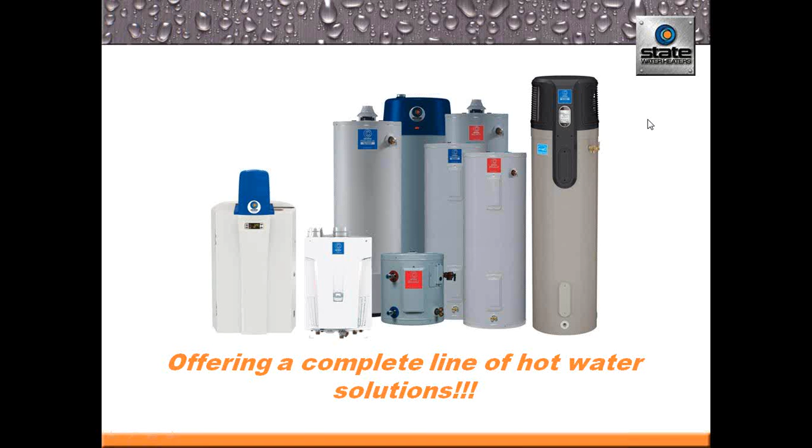I'll go over all the changes for 2014, and next I'm going to touch on the preparations taking place right now for 2015 with code compliance changes that are on their way.

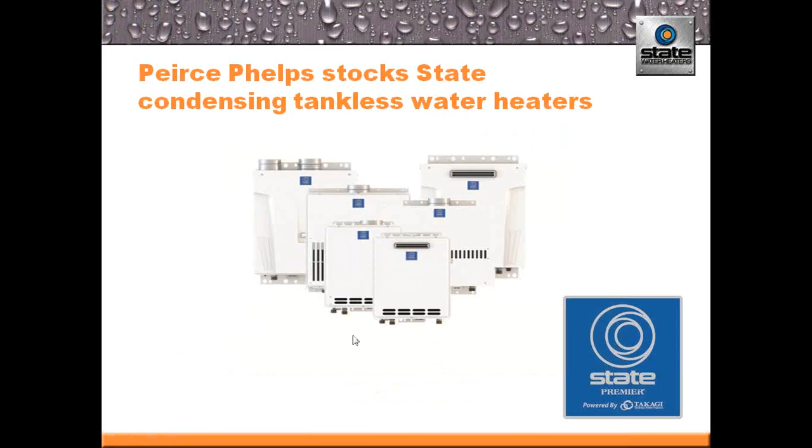As always, we have the fullest breadth of products in the market, and we continue to add to our product offering. As many of you are probably already aware, Peirce Phelps is now stocking State tankless water heaters, manufactured by Takagi. State owns Takagi North America, so we control that manufacturing.

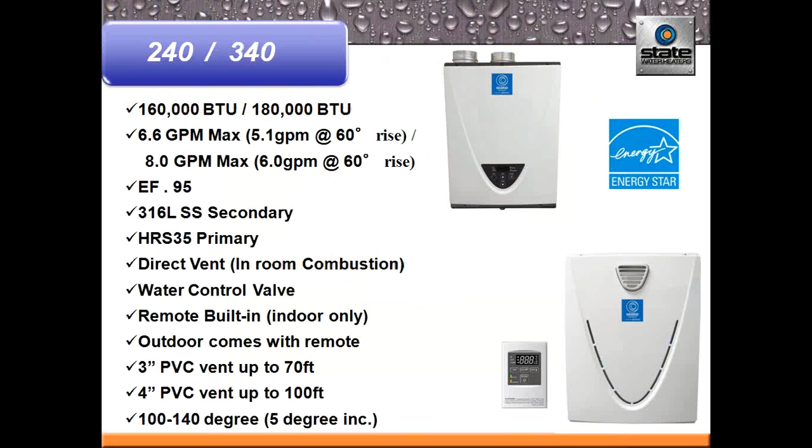Just a little side note for everybody, we are in the process of developing a manufacturing facility here in the U.S. that should be complete hopefully in another 2 to 3 years, where we will be manufacturing 100% American-made tankless water heaters. So we'll be the first manufacturer to have that, which will go a long way with our contractors and with the end users as well.

The models that are available, that Peirce Phelps is stocking, are all of our condensing models, which is 3 models, a 240, a 340, and a 540. BTUs go from 160, 180 to 199. They are PVC vented, Energy Star rated.

One thing we've started doing here in the past year - for forever, up until a few years ago, stainless steel venting was the preferred way to go with non-condensing units. We have a full line of non-condensing units, but Peirce Phelps and us decided the best route to go is all condensing.

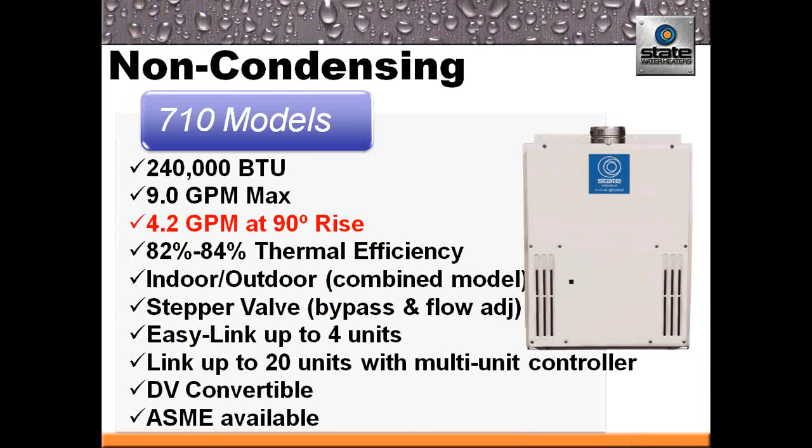Number one, at the end of the job, as far as material costs go, in most cases a condensing unit will be less expensive than a non-condensing unit. Once you add in all the venting, it becomes a lot more costly with the stainless steel venting on the non-condensing unit. Also, you're getting higher efficiency, as much as 10%, with the condensing unit versus the non-condensing. So it's a better unit, better performance, and in most cases less expensive.

In addition to the 3 condensing models, we have 2 non-condensing commercial models, a 710 and a 910, 240,000 and a 380,000 BTU unit. They can be piggybacked up to 20 units - you can link 20 units together for commercial applications.

Each of these units has 2 heat exchangers, so there is redundancy - if you were to lose one, you do have backup and the unit will stay up and running, which is extremely critical in a lot of commercial applications, especially when you're talking healthcare facilities and restaurants that have to have a minimum temperature of water available, or they have to be shut down. They can't operate.

All right, David? Yeah.

With that being said, as far as our normal tank type water heaters, we have recently expanded our Energy Star offering. So now we have atmospheric gas, high efficiency atmospheric gas, power vent, and our heat pump electric water heater that are all Energy Star rated.

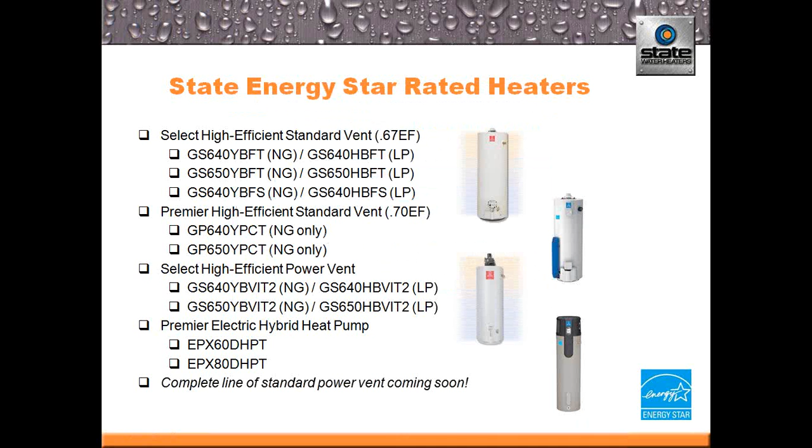We're starting to see Energy Star ratings being mandated in certain jurisdictions, or they're offering rebates. I know New Jersey right now is offering a pretty hefty rebate on power vent Energy Star rated water heaters, which is our new power vent - a 0.70 Energy Star rated water heater that we introduced last year.

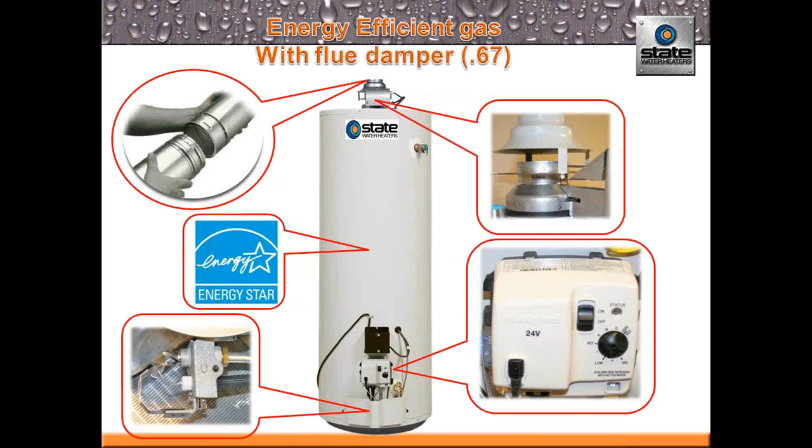And the next slide, David, if you want to slide over to that - this isn't the water heater I'm talking about, but this is our Energy Star rated atmospheric vent with a damper. And then the next water heater will be an atmospheric Energy Star rated water heater as well, a little bit higher efficiency at 0.70.

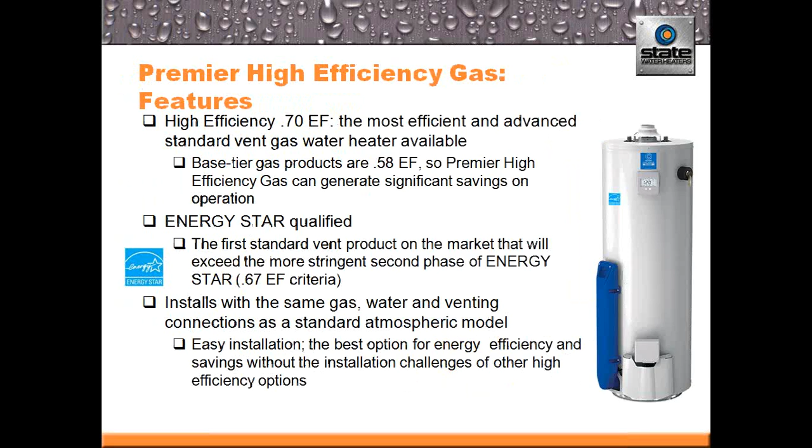And then the next heater here is the one I was just talking about - this is our new power vent heater that was released last year. We released 2 models to start, a 40-gallon short and a 50-gallon short, and now we have a full offering: 40 and 50-gallon short and tall, and a 75-gallon. They're also available in side taps for heating applications.

So looking at the breakdown of parts here on the screen, you see some of the changes. I just want to point out, there are several really neat changes and additions they made to this heater, but to me one of the most important is on the far right-hand side.

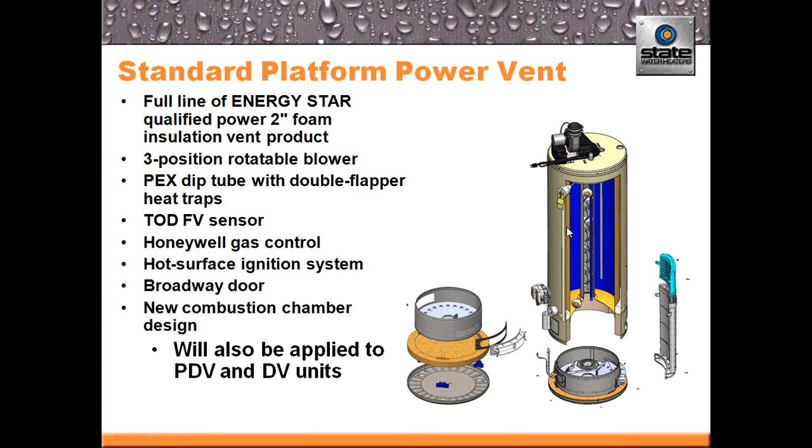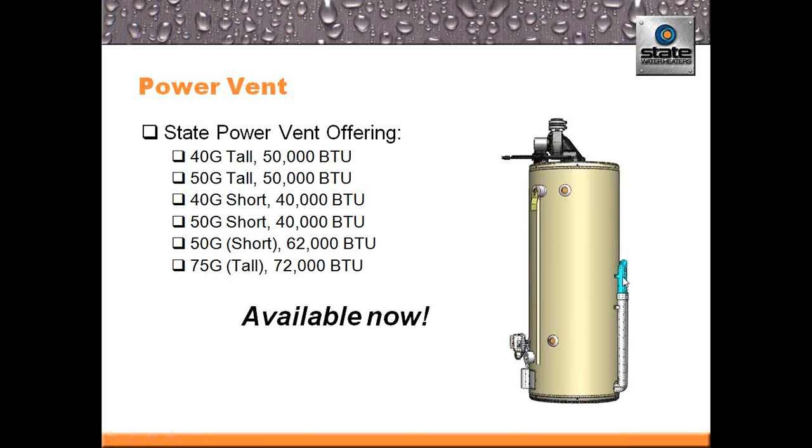We call that the snorkel - the long wide-shaped unit. If you go to the right there with the cursor, David, it's blue at the top - there, you can see it. That's our air intake. So the combustion air is now entering somewhere around 25, 27 inches off of the floor, and then it travels down the tube into the bottom of the combustion chamber, which in the past all of us manufacturers have experienced problems with, especially in multifamily applications.

Apartment buildings have been a big issue where there's a lot of dust, lint and dirt traveling across the floors, and they get sucked right into the bottom of the air intake. So that is going to eliminate that problem.

The other additions to this unit: we now have a 0.70 Energy Star rating, and the blower assembly on top of the unit can rotate a full 180 degrees. So when the contractor gets the unit out to the job site, they can rotate that blower assembly the whole way to the left, the whole way to the right, or take it straight up out of the top of the unit. That gives them venting versatility when they're in a replacement application.

I have lost my screen. What can you see? My screen here has gone blank. I see a black hole. Yeah, I really don't have much to speak about that. There we go. I don't want to have to start singing, so...

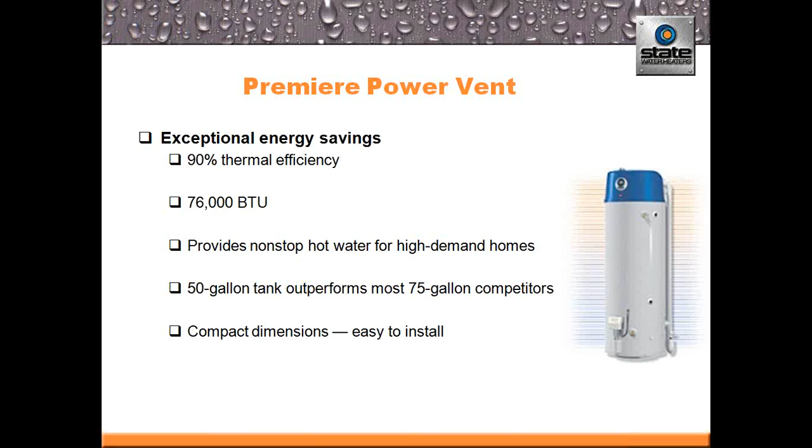Okay, cool. All right, so the next water heater is our Premier Power Vent. We've had this unit and its big brother, which is going to be on the next slide, out for several years now.

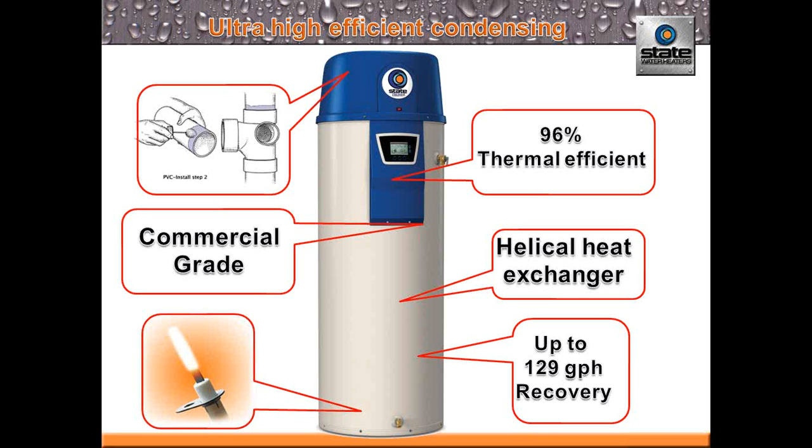In previous years, they weren't Energy Star rated because the code was that anything above 75,000 BTUs could not be Energy Star rated. The power vent unit is 50 gallons at 76,000 BTUs, and the power direct vent unit is 96% efficient at 100,000 BTUs. They recently changed the cutoff point to 100,000, so both of these units are now Energy Star rated.

They both have side taps and are high output. If you compare this 50-gallon unit to a 75-gallon heater, it outperforms it in delivery and recovery. So it's another nice option if customers are looking at going high efficiency.

This would pair very well if you're selling high efficiency Carrier Bryant equipment, then this may be an option that fits in nicely with that sale. Our hope is that when you're selling the heating and cooling system, particularly if selling on efficiency and quality, there may be an option to also replace the water heater at the same time.

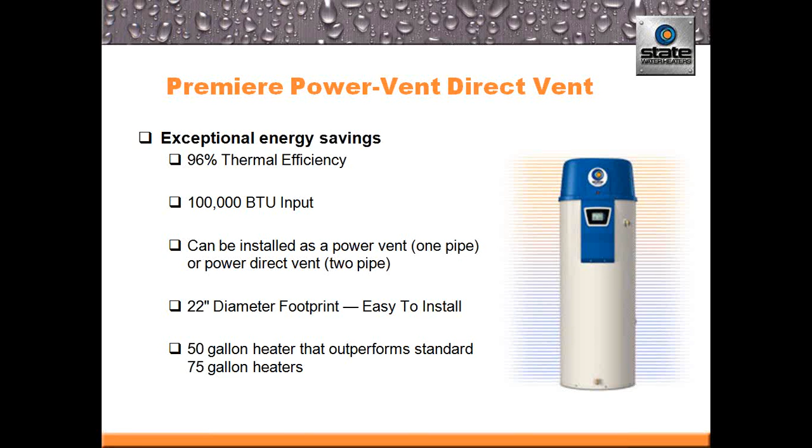Right, yeah, absolutely, good points. The other thing we run into more and more is high volume showers, what we call car wash showers, where they're putting out anywhere from 10 to 25 to 30 gallons a minute in one shower.

People don't understand when they build these showers, or have them built, in most cases they're not informed as to what the demand on their water system is going to be on their water heater. So what we've started to do, I've done this in several jobs, is take one of those two units, which do have side taps, and tie that into an 80-gallon electric water heater, or even a 50-gallon, and use that as a storage tank. Just putting it out there, there's a lot of different things you can do.

As David mentioned, you can tie it into an air handler as well, which we've been doing for many, many years, especially down south and actually in the Philadelphia area. I'm sure you guys run into it - it's very common to use a water heater as the heat source for the air handler.

All right, moving on to our heat pump water heaters. We first introduced the 80-gallon several years ago, then introduced a 60-gallon a little over a year ago, and we've just recently introduced a 50-gallon.

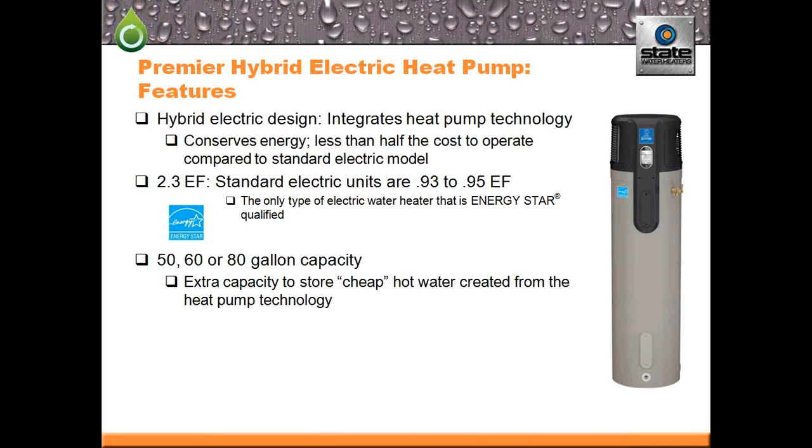They're more expensive than your standard electric water heater, so obviously you expect a return for that investment. With that being said, keep in mind that capacity is key with those units.

All of our gas water heaters now have the Honeywell gas valve on them. That change was made in the past year. We started about 2 years ago, and all of our units now have the Honeywell gas valve.

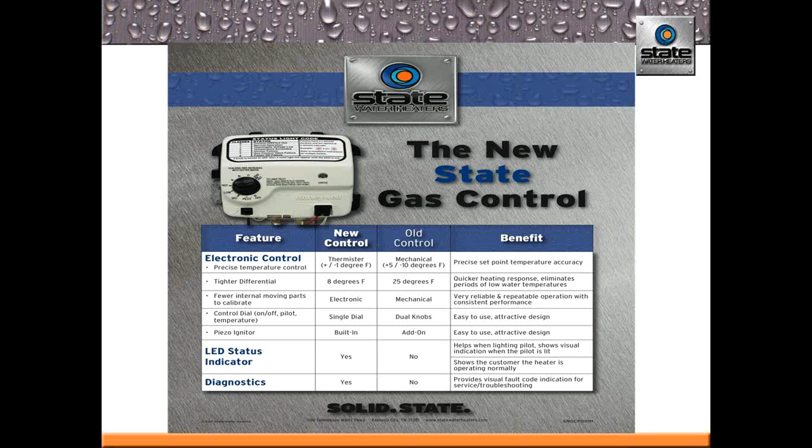As far as support and training, we at ROI recently, within the past 3 months, have hired a full-time master plumber to do nothing but training for us, technical and hands-on training, and he also does service inspections and provides service support in the field.

He's done a number of training sessions at dealer offices, and we can do that first thing in the morning, late at night, or whenever it works.

We have 6 trainings scheduled. Starting next week is the first one. We're going to conduct 2 a day for 3 weeks straight. Our new trainer, Paul Burke, will be coming up to Pennsylvania from Maryland to conduct those trainings.

As previously mentioned, we see the need for training moving forward as equipment continues to change, codes continue to change, and technology continues to get more complex. Training is absolutely key, and I know Peirce Phelps puts a huge focus on that.

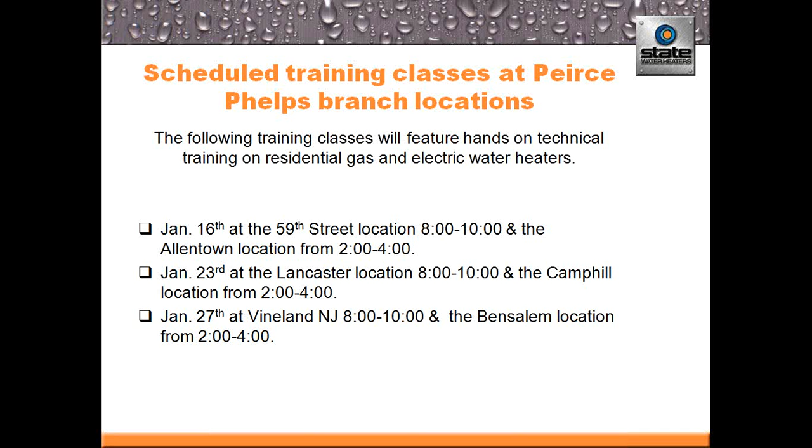We're totally flexible. The only limitations are with equipment. When we have to go to a contractor's location, we can take components with us. We do have a live fire tankless unit that's easy to transport, but as far as commercial or residential units, that's where we're a little limited. Still, we can bring all the major, important components with us to do adequate training on troubleshooting, setup, and so on.

Industry news, I touched on this earlier. NAECA III compliance is going to go into effect April 2015. This is going to be a major change in the industry.

There are several issues they're still working out, and all different manufacturers are having the same issues. To get that 0.95 energy factor, they have to go to 3-inch foam. The problem is they're now widening the unit by a good inch and a half in some cases. It doesn't sound like much, but we've all seen applications where the water heater is jammed into a small closet where every millimeter counts.

This is ongoing right now. They're making some strides, but at the same time coming across hurdles they have to get over. All units above 55 gallons electric—the heat pump water heater as of right now is the only electric unit that meets the new requirement, which is a 2.0 energy factor.

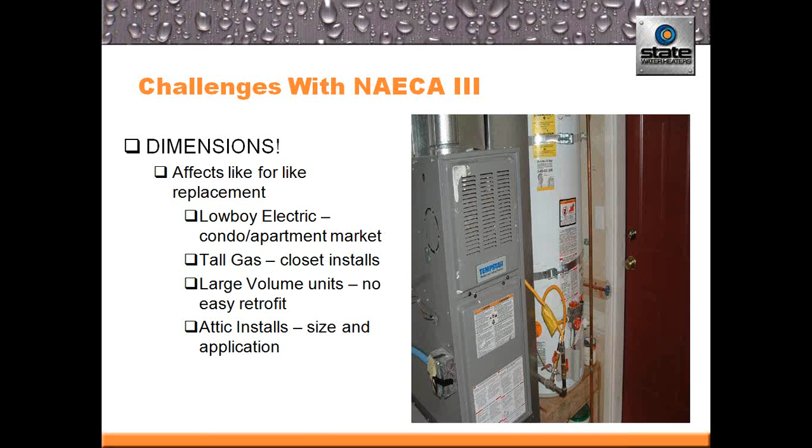Here's a snapshot of an application I briefly touched on, where the water heater is jammed into a closet right beside the air handler, and there's not a whole lot of space. Again, to meet the new requirements, it's taken a lot of engineering and design to figure out the best way to meet it.

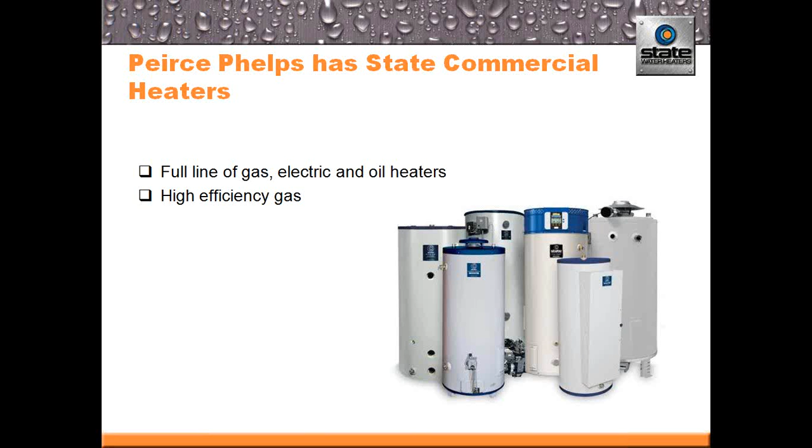Commercial units—Peirce Phelps is stocking State commercial. We have the largest line of products on the commercial side. We have the most popular commercial water heater in the market.

This water heater, our Ultra Force water heater, you can see all the different sizes available. This unit makes up over 55% of all commercial water heaters sold in the market today, which shows you the demand for it. It's 96% efficient, which is outstanding for a commercial unit. Peirce Phelps has some of these models in stock, and obviously has availability to the full line.

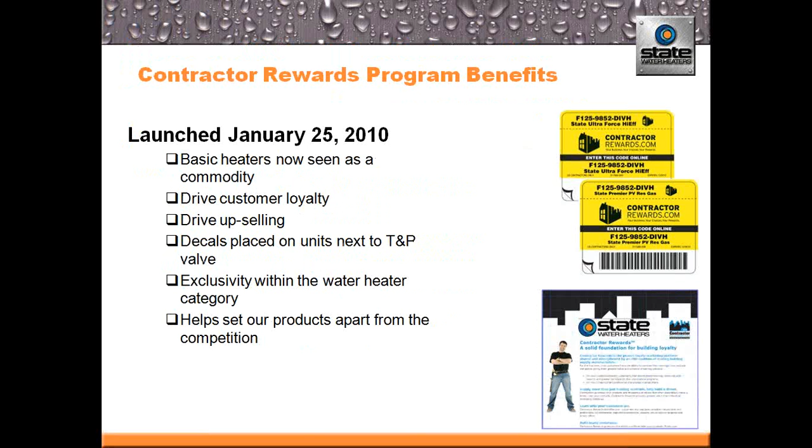Contractor Rewards Program. This has been ongoing since 2010. For those of you that aren't familiar with it, every single water heater sold, whether tankless, residential, or commercial, has that yellow sticker you see on the screen, on the side of the water heater. All a contractor does is enroll at contractorrewards.com.

He then has his own account, and can enter the codes off of those yellow stickers as he purchases water heaters. They can accumulate them and enter 100 at a time, or one at a time, however they want to do it. This accumulates points in the system under their account, and they can redeem that for gifts, tools, and a variety of other products. There are thousands of different products they can redeem.

There's a little snapshot of it as well. The other thing the factory added, I believe middle of last year, in conjunction with Contractor Rewards, is that when a contractor is enrolled, they get listed on our preferred contractor or service provider tab. So when a homeowner goes into the website and clicks Find a Service Provider, the contractors in that given area will be listed when they enter their zip code. Contractors are listed according to their contractor rewards points, so the more points they accumulate, the higher up on that list they go. It's a nice added feature for the contractor to develop more business and promote themselves.